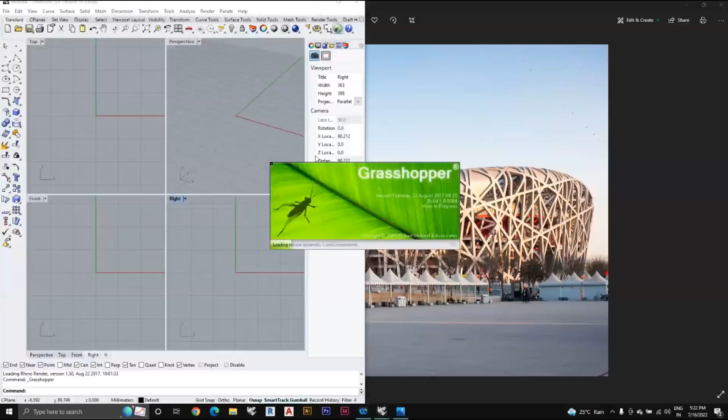So now I'll just move on to my Grasshopper and Rhino screen, and Grasshopper is also enabled.

Now the method that I will be using is, first I will create the shape of the Olympic Stadium, and then what I will be doing is I will create the sort of mesh, or the sort of pipes, the steel structures that you are already seeing, which will be created onto the surface, and then we will combine it and create the surface.

For that, first what I will be doing is creating an ellipse. You can see that this stadium surface has a base point which is a curve, this is the ellipse, then you have the midpoint, which is again a curve, and then the center curve, which is the stadium. So I'll be creating three curves with the help of the ellipse tool.

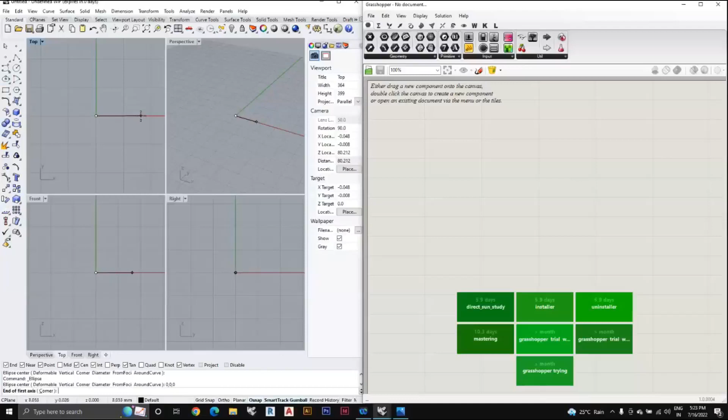I'm just clicking out here and typing 0 comma 0 comma 0, which is basically the center point, and then clicking on the side to make an ellipse. On the third click it will create an ellipse.

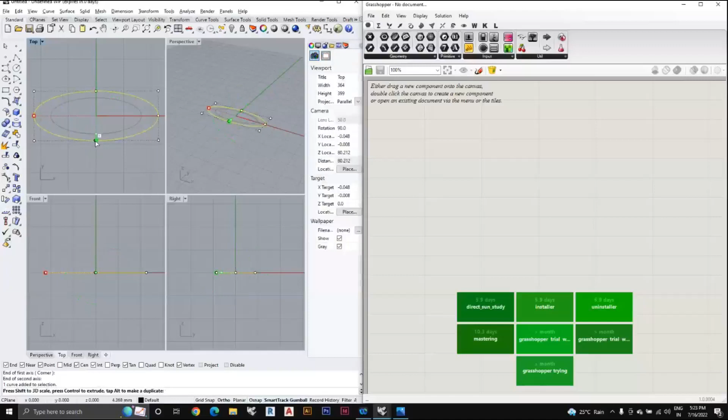Now what I'll be doing is trying to offset it and create the offsets of this ellipse, so as to create the concentric circles. I'll click on Alt as well as Shift, then press on this and just move it. Now we can see that it is creating an offset. Again I'll click and create an offset, so you will see that there are three curves being formed.

Now what I'll do is move it to levels in this front elevation, so that it gives the height for the curves. First I'll move this outermost circle to a point height, so it gives the outer curve of the Beijing Olympic Stadium, and then I will move the centermost curve onto a middle level.

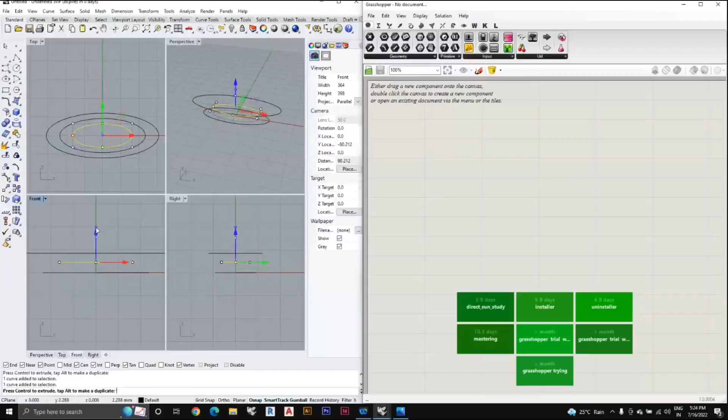Now what I'll be doing is I'll loft all these curves. For lofting, I will not loft it in Rhino, but I will loft it in Grasshopper. Why I am doing it, within a few minutes you will understand that.

I'm just double clicking it, typing curve, and you can see curve appears. So this is a point in Grasshopper. Now I want to select the curves in the Rhino.

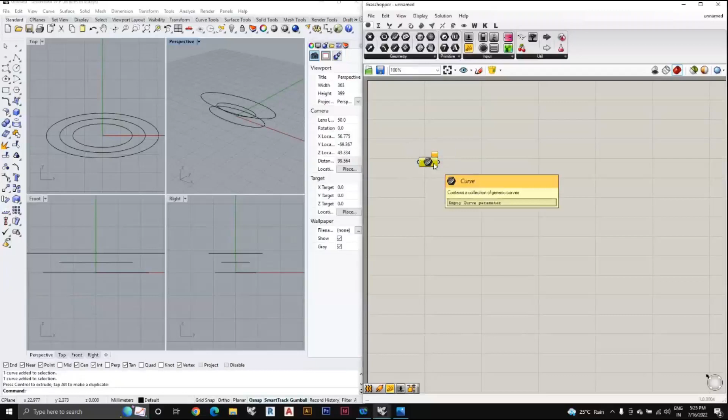So what I will be doing is selecting this and then right clicking, and you can see there is an option to select multiple curves. I'll select these multiple curves according to the way I want the curve to be, or the loft to appear onto it.

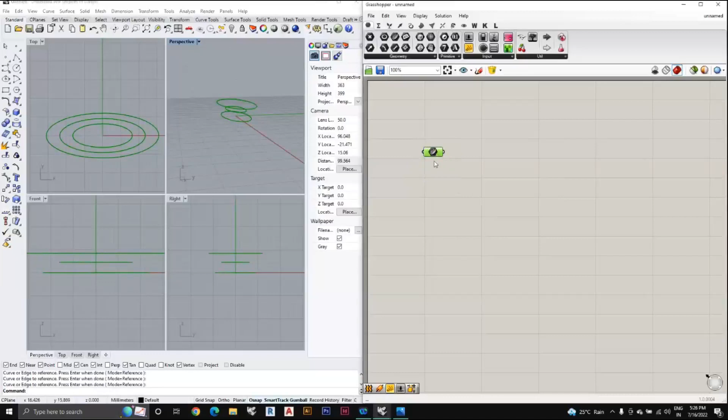So loft is nothing but a skin that is going to be put on top of this curve. First one, second one, third one, I am pressing enter. So you can see that this point represents the curves out in this Rhino.

Now what I'm going to do is loft it. So I'm just typing loft, then you can see that a plugin comes out here like this, connecting this to the curve. So now you can see that you have got a design like this.

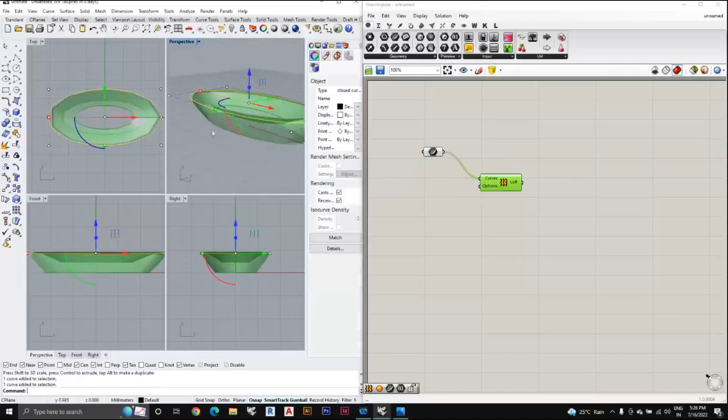So with this, what you can do is change the curve's position, as well as try to manipulate it a little, and also change the curve's sizes a bit, however you want.

I'm just making it a little more proper now. And then what I'm going to do is change it.

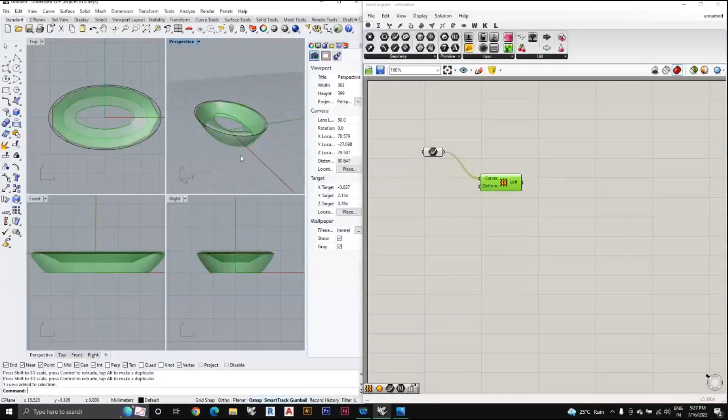This is one advantage of lofting out in Grasshopper. This loft option allows you to change or manipulate the curves in Rhino. The curves are easy for you to manipulate, so I'm just taking it down a little so you can see it getting manipulated. The loft command updates as you change things in Rhino.

If you had lofted out directly in Rhino, you would not be able to get this sort of freedom to change things, or you would have to modify it after you've lofted it. So this is what I have done right now.

Second thing we are going to do is create a mesh like the steel structures you are seeing. The technique is to make a sphere and engulf this one, then create random points, and from that put on some normals which go and stick on top of this shape. So this is the flow that is going to happen.

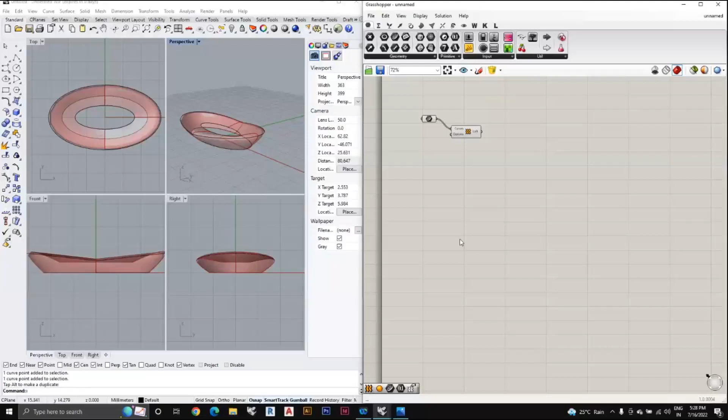First we need to create a sphere, so I'm just typing sphere and entering it. Then I'm going to have a radius for it. I'm keeping 20, putting it on top, and making the slider go up and down so that it gets engulfed onto this surface.

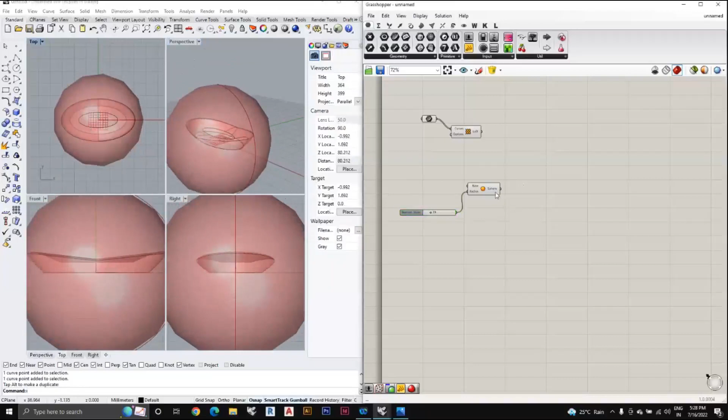Then I'm going to have a populate tool, so I'll type populate 3D. What populate does is give you random points. This is the region that I want, and the count I'm giving as 80 with the help of a slider. Just type 80 and you get a slider, then connect this as the count so that you can manipulate it as and when required.

Then you need to have lines being thrown, so for that we add what's known as vector 2 points. This would be our second point — the point arising from here will be the last point where the line comes, and the first point will be some random curve from the midpoint. So we will have random lines arising.

So for that we need what's known as construct grid of lines, or construct point — an option known as construct point, which would be our first point. I'm just clicking that too.

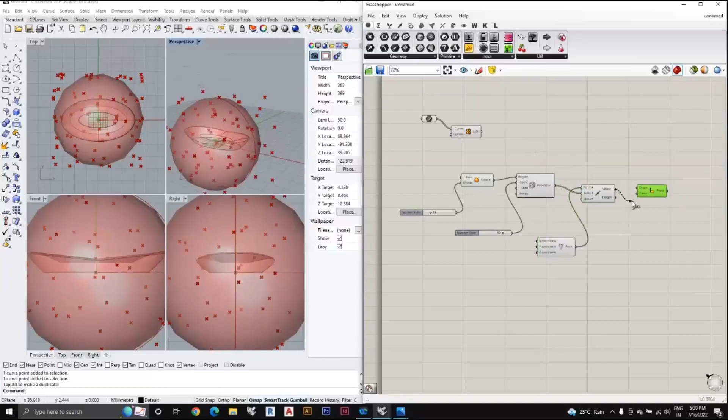Then we need to throw some normal lines from that, so for that we'll use something known as normal plane. We create that with the z-axis, and the origin would be from the points that are there. I'll press shift and give it to the origin so that there is no break.

So I created something like that, and now what needs to be done is I need to create a BREP, which is nothing but a plane. So I'm typing BREP plane, and now you've got a BREP plane. Since this is a plane, we need a BREP of a plane, so I'm clicking this, and the second BREP to connect is nothing but the surface — if you have some other surface, the line would form on top of that. I'm clicking this onto the line, and now you can see something has happened on our surface.

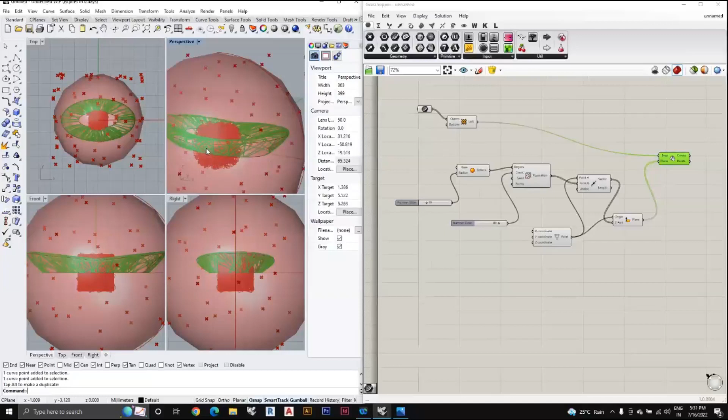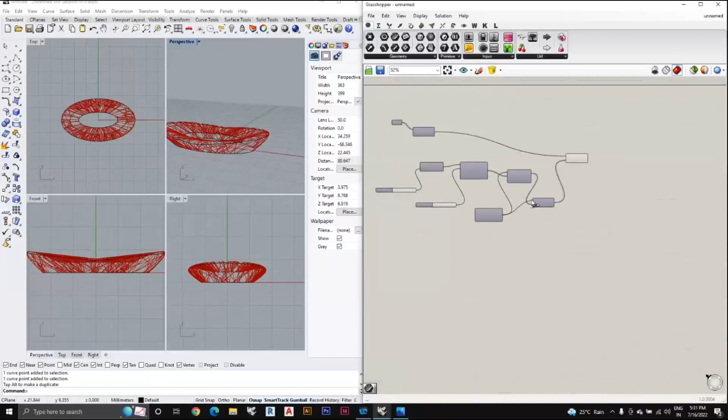So what I'm going to do is select all, press the midpoint of it, and disable preview so that you can see the surface out here, the mesh that is being created, is being formed. Got it? So this is the method used to form some random columns of meshes onto this surface.

Next, I want to add some thickness onto this pipe. Right now it is just a single line, so I need to add some thickness. For that, I need to select these curves, so I'm just typing curves, and you'll get an option like this. Just connect this, and then I'll add some thickness.

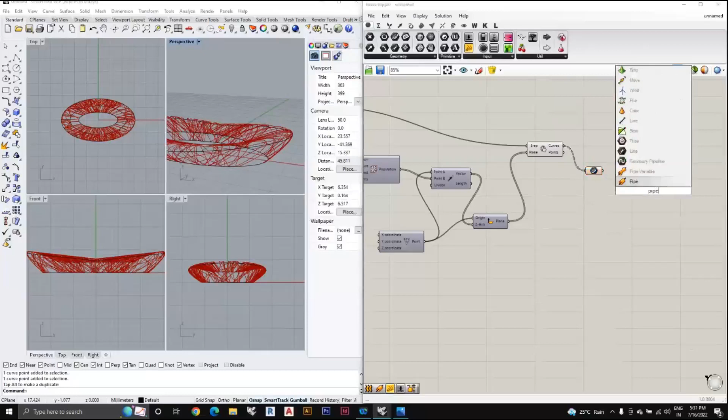For thickness, normally we use a command known as pipe. Just select this pipe and give the radius as 0.2 or so. So now you can see the thickness. I'll just reduce the thickness some more, to 0.1 or so. Okay, so it looks better now, right?

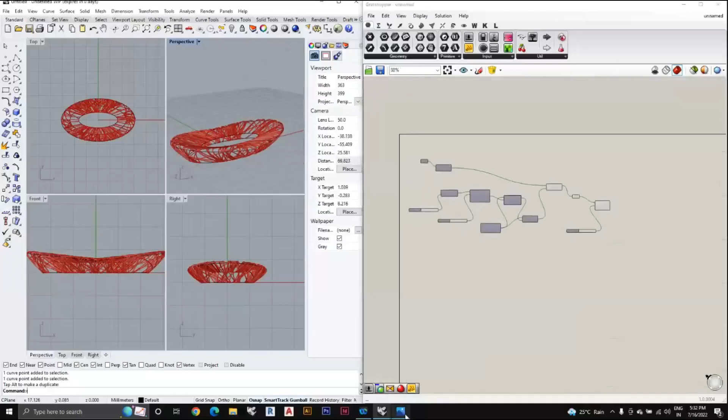So you have basically created the outermost skin, or the outer sides that you have seen. This one, the mesh is being formed, right? So now what we have to do is see the outcome.

For seeing the outcome, normally what we do is custom preview. That is a method used to see the previews. This will help you give the geometry and also give the material color.

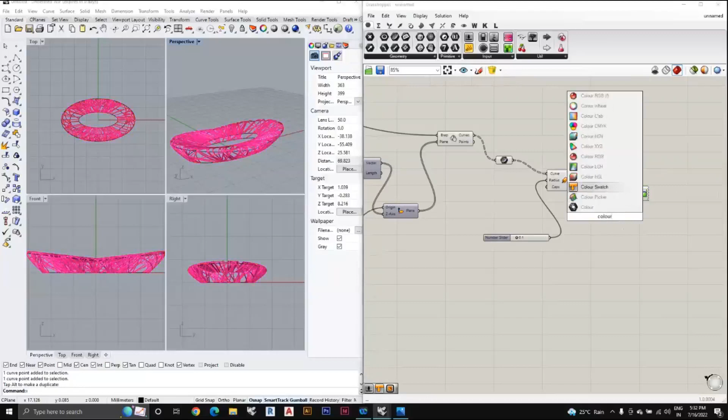So for giving the material color, we normally use color swatch. I'm just connecting this color swatch onto this, and this color swatch you can change. I need it to be something like a red color, but you can change it according to your wish. Let it be blue, no, let it be red in color for me right now. Just changing this one, okay, this would be fine.

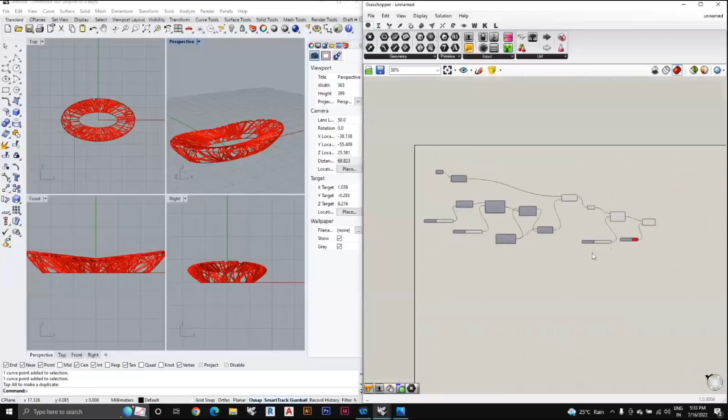And giving it, now what I need is this curve that we already have also needs to be shown, right? So I'm just clicking on this, making it visible. Then I'm going to add the same custom geometry, custom preview, out here as well. I'm just pressing shift and adding it, because shift lets you do multiple lines or connections.

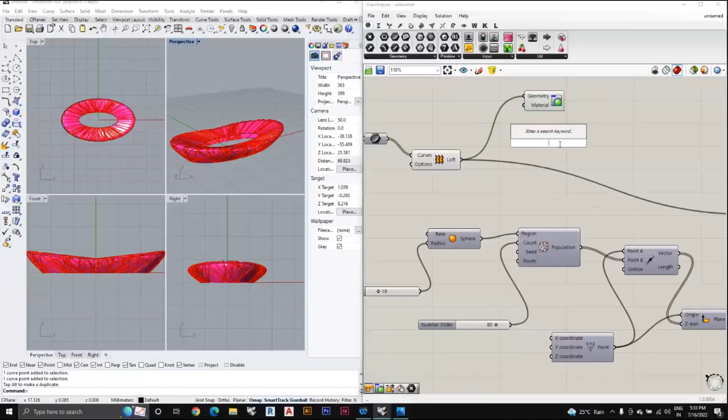And then for material, I'm just going to add color swatch and connect it. From here, I'm adding it a little more transparent. No, let it be blue in color. So I'm increasing the saturation, going to blue, and changing the transparency a little. So this would go, and now you can see our Beijing Stadium is ready.

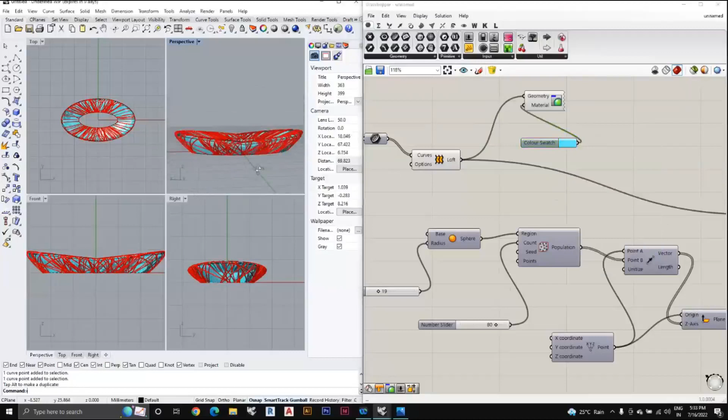Got it? Now you just need to bake this. Baking is nothing but transferring the file from Grasshopper onto Rhino. So what I'm going to do is bake this, just right click onto it, there's an option known as bake, give OK, and that is baked.

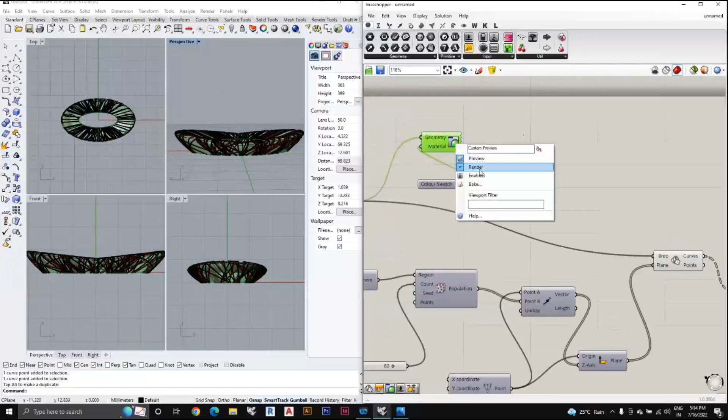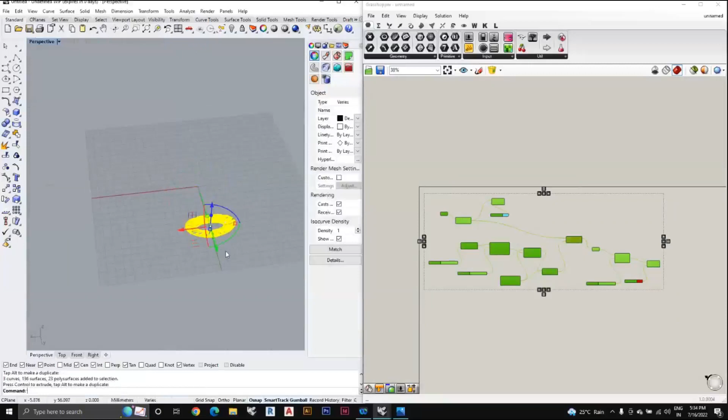Second one out here, just click on this, right click, give the option bake, and give OK. So these two get baked, and then you need to make sure everything is set, then go to your Rhino screen, double click, move this side a little, and let it be there itself.

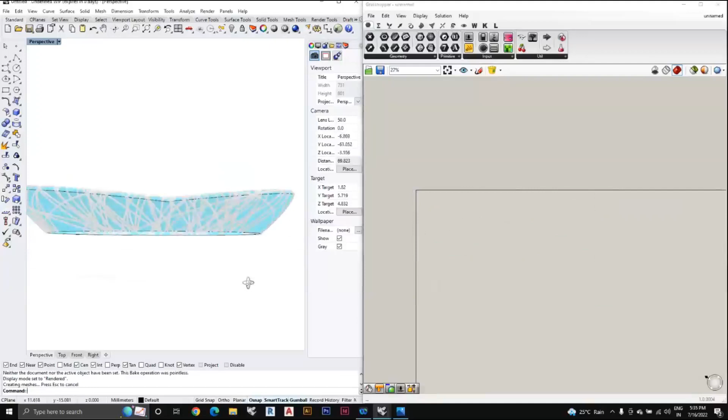Just going to the rendered view. So you can see that this has been formed. There's a problem out here, right? What's happening is it's basically overlapping with the ones in Grasshopper. I'm just deleting this right now, so you can see that you have basically got the rendered view of the file. That is how you create the ones from Grasshopper.